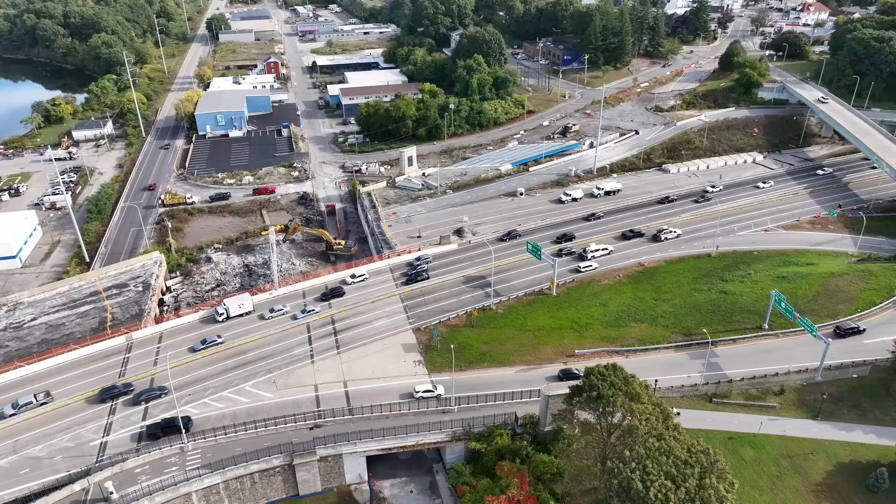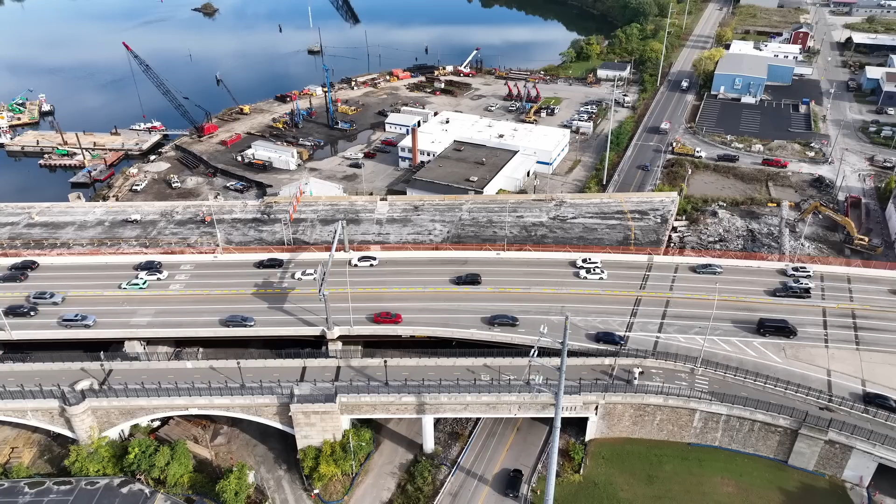Well, hi everyone. I've got a lot of new information that I don't think anybody else in the public domain has at this time. So I want to go over what's going on with the Eastbound Washington Bridge in Rhode Island. As you know, I've done numerous videos about the Westbound Bridge saga going back to its emergency closure back in December of 2023. So I'm not going to address that, but Rhode Island DOT got caught off guard by the poor condition of that westbound bridge, so they had to shut it down in an emergency, and now of course they're tearing it out and going to replace it.

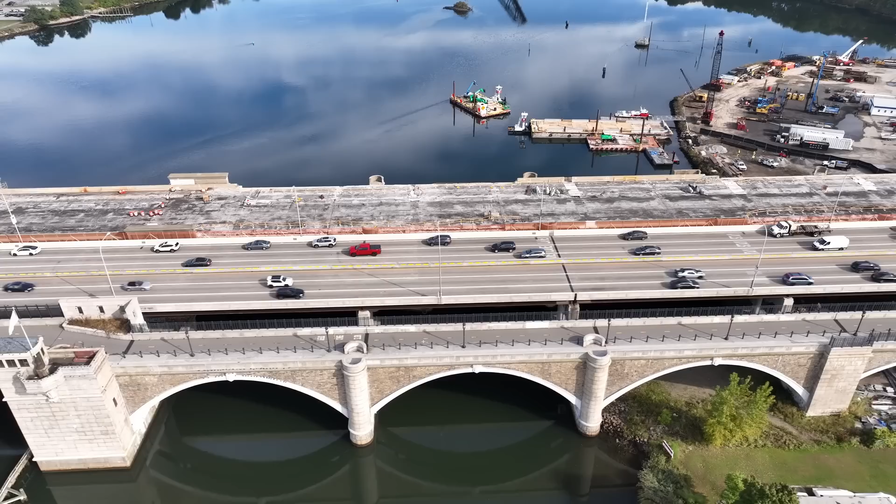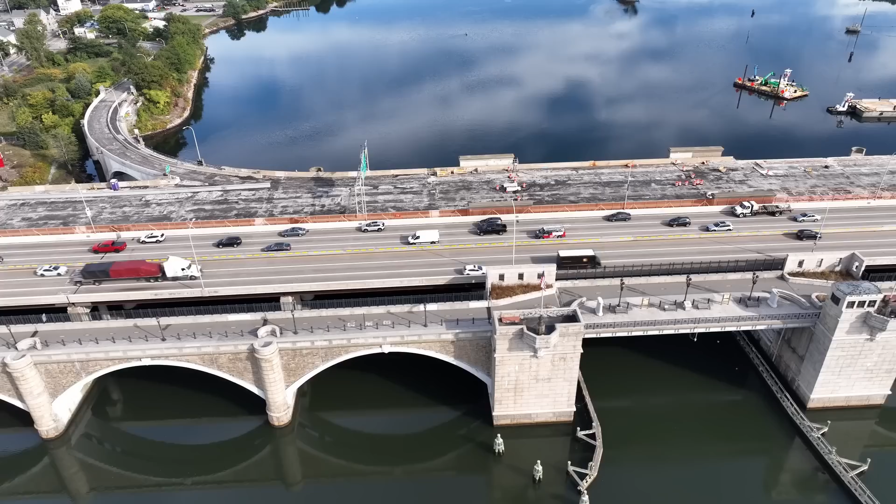But it always made me wonder, what about other bridges in the state of Rhode Island? Are they actually aware of the true condition of these bridges? What about the eastbound bridge? Because the eastbound bridge is now carrying 6 lanes of traffic, double the amount of traffic that it was supposed to be carrying. So I'm going to go through my sources of information. I'm going to share plenty of screenshots. In a nutshell, I'm going to tell you what the condition is of the eastbound bridge, what the concerns are,

and what I think needs to happen to improve the transparency from Rhode Island DOT. I don't think they're transparent at all. And saying they're not being transparent is giving them the benefit of the doubt. Quite frankly, I think a number of their statements, particularly those made by Rhode Island DOT Director Peter Alviti, have been outright misleading. But let's just go through it here.

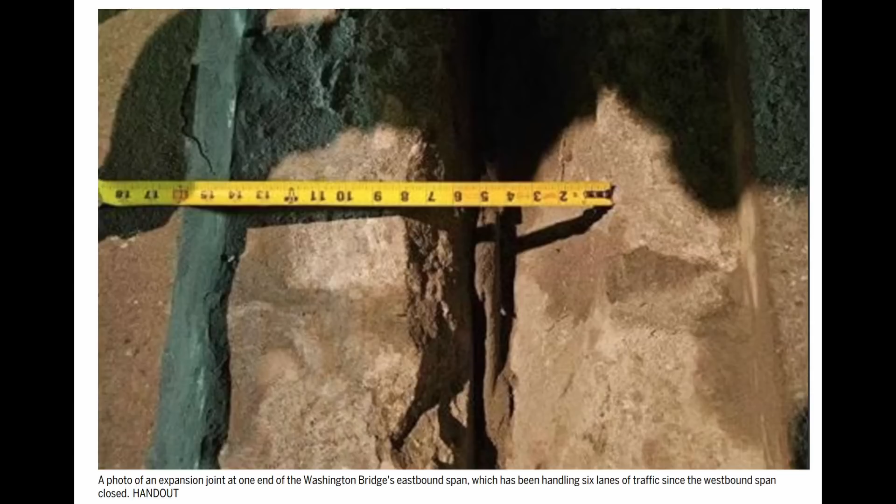And what got me thinking about the eastbound bridge even more was this publication last Friday by Ed Fitzpatrick with the Boston Globe. He cited internal sources for emails, photos, and other information for the poor condition of a joint at the end of the Washington Bridge eastbound span. And here's a photo of this. Now keep in mind, the information that I've compiled indicates that this eastbound bridge was rebuilt in 2008. The original bridge was constructed in around 1930, and it was completely redone in 2008. So you see photos like this for a bridge that was only 16 years old. This is a shocking amount of deterioration at this joint.

So the other thing that happened, the end of last week, Rhode Island DOT actually complied with my request for public information about the condition of the eastbound bridge. And I got a number of inspection reports, photos, and other documents, and I'm going to hit the highlights for you here today, but I'm just going to tell you the bridge isn't in that good of condition. It's rated as fair condition. So again, I'll go through the details.

Now this is one of 2 requests that I made recently. Please provide results of the Bridge Monitoring System Structural Health System for Bridge 200, which is the Eastbound Washington Bridge, from the time of installation in 2024 to date. And their answer was they couldn't send me any information as the Structural Health Monitoring System is still being installed.

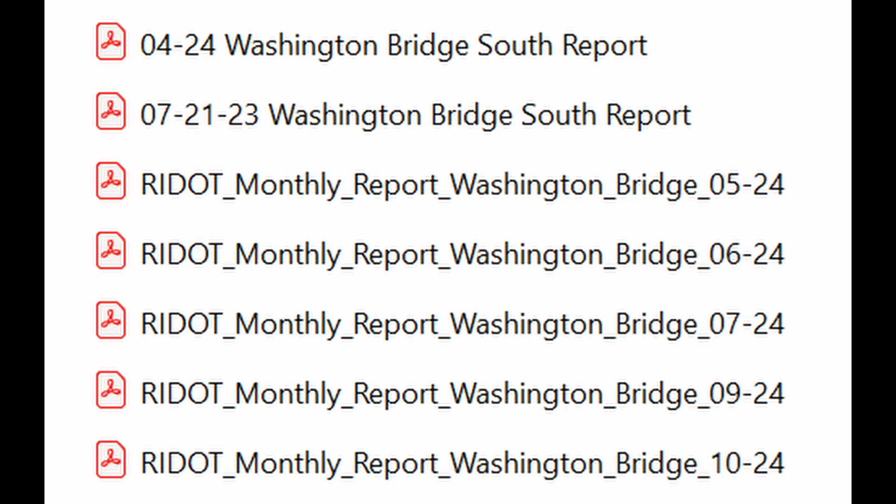And here's an excerpt from that inspection report. The superstructure consists of 10 weathering steel plate girders, continuous over all piers except piers 4 and 9. So they talk about these girders having uneven bottom flanges up to 1/8 of an inch out of plane, with some locations measuring up to 3/4 of an inch out of plane actually. And then their fascia girders have scattered, misdrilled, unused holes near the piers adjacent to the scupper downspouts.

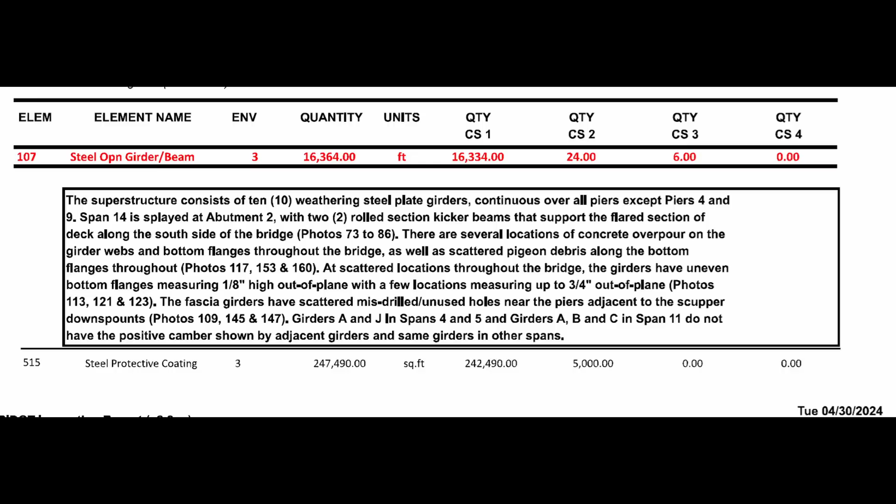And then girders A and J in spans 4 and 5 and girders A, B, and C in span 11 do not have the positive camber shown by adjacent girders and same girders in other spans. So camber, think of it as a gentle bending or arch, say of a bridge deck, or it could be a structural element of a bridge. But think back to that story where there were a bunch of runners on the Golden Gate Bridge and the camber flattened out, which was quite alarming.

So it's a way of safely transferring the load and having some redundancy in the load resistance for the bridge. So when you're missing positive camber, it can be problematic from a loading standpoint.

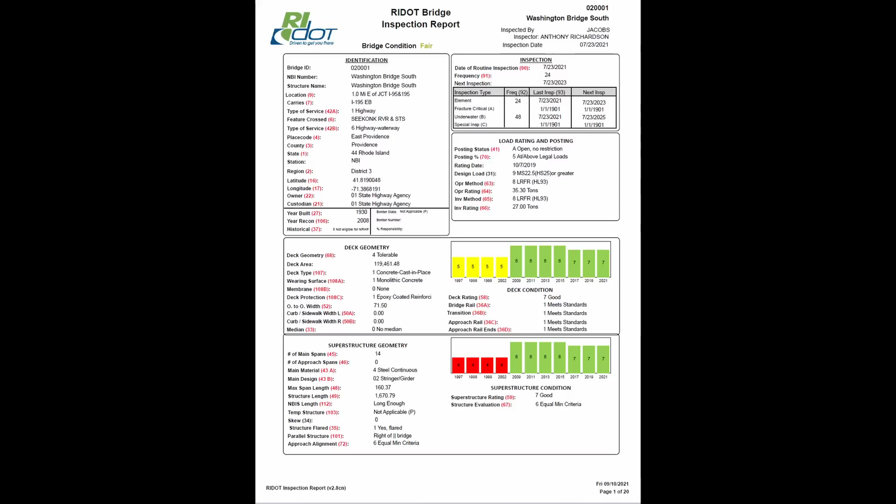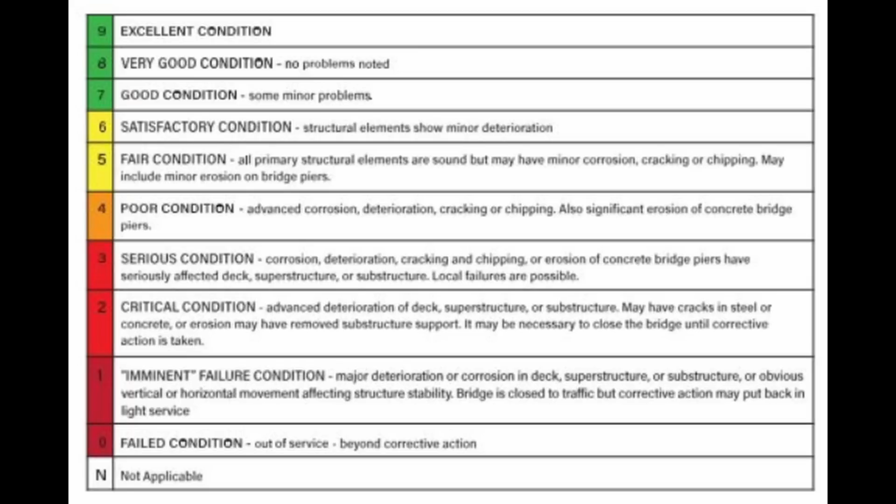And here's the 2021 report. Again, fair condition. In 2019, again, fair condition. So what does fair condition mean for the bridge ratings criteria? It's sort of in the middle of the pack. Fair condition: all primary structural elements are sound, but may have minor corrosion, cracking, or chipping, may include minor erosion on bridge piers. So that's the overall rating.

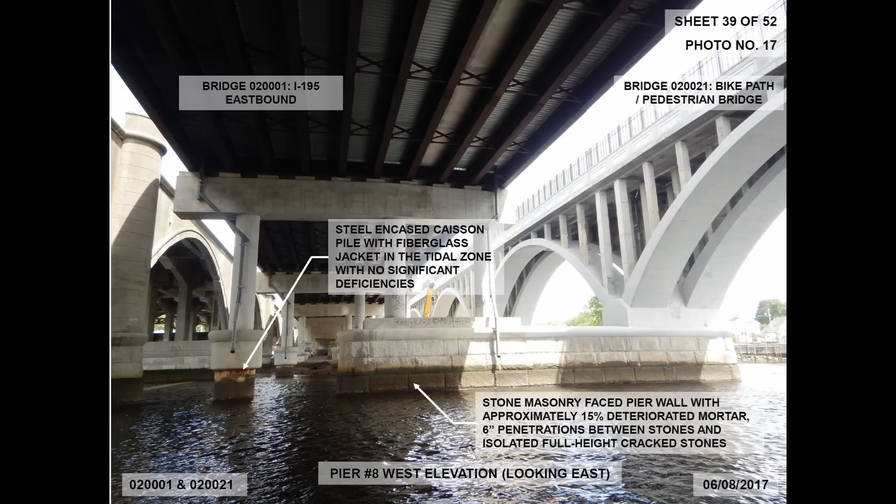So here's a layout of the eastbound bridge, Bridge 020001. There's a pedestrian bridge on the south side, then you have the eastbound bridge, and then north of that you have the westbound bridge. And this is an excerpt out of one of these reports, and you can see it appears, and I haven't been able to find a lot of detailed information about what was done to replace the eastbound bridge in 2008. But it looks to me as if the pier, the existing pier, and undoubtedly the foundations for the original bridge were reused.

You see this pedestrian bridge off to the right. You see this old masonry pier. I mean, that does not look like 2008 vintage to me. And then you have a column on the end of the new pier that looks to be supported by a drilled shaft with a steel outer casing. So it looks to me like they reused the pier, and because the width of the bridge was greater, they had to put in these piers off to the side, these drilled shafts, I should say.

Some people use the term pier and drilled shaft synonymously. I use the word drilled shaft so as not to confuse it with the overall bridge pier. You could have several drilled shafts supporting one bridge pier.

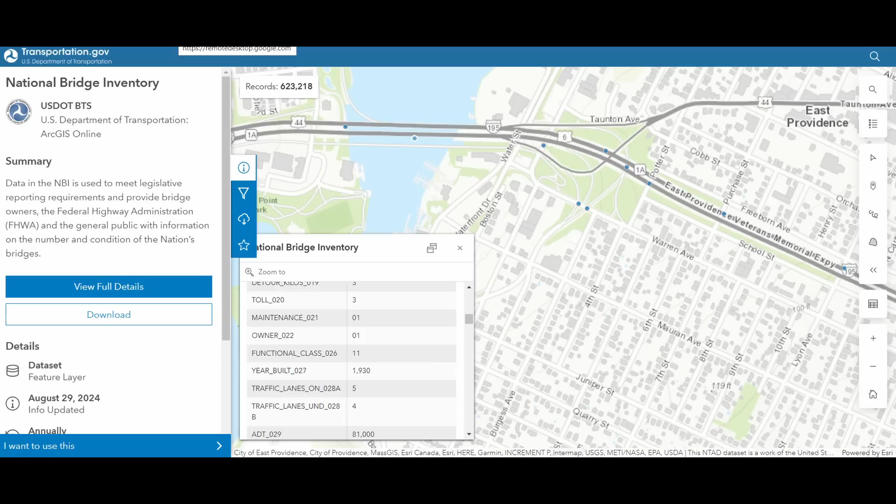And an interesting thing, in the Federal Highway Administration's National Bridge Inventory, they indicate, this was from 2021, that the bridge was built in 1930. I don't know the criteria for listing the age of the bridge in the National Bridge Inventory, but presumably because it's reusing the existing piers and perhaps the existing foundations, that sets the date of the bridge. I don't know, but I just think that's kind of interesting.

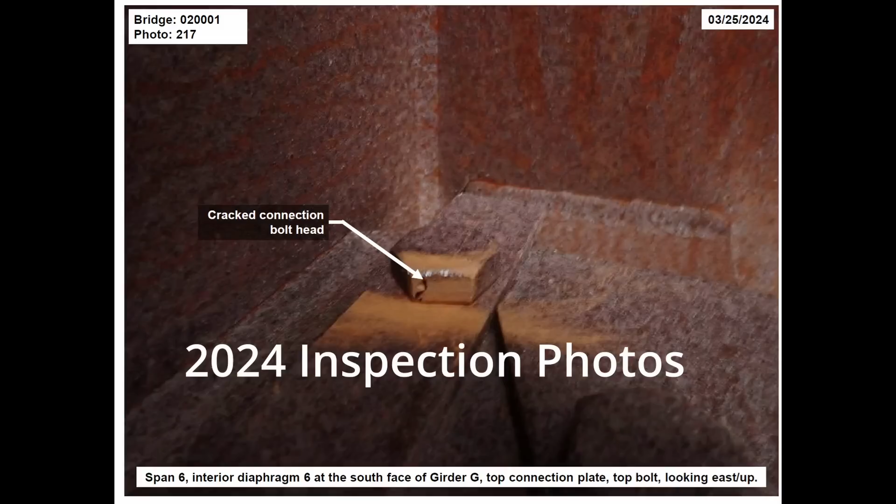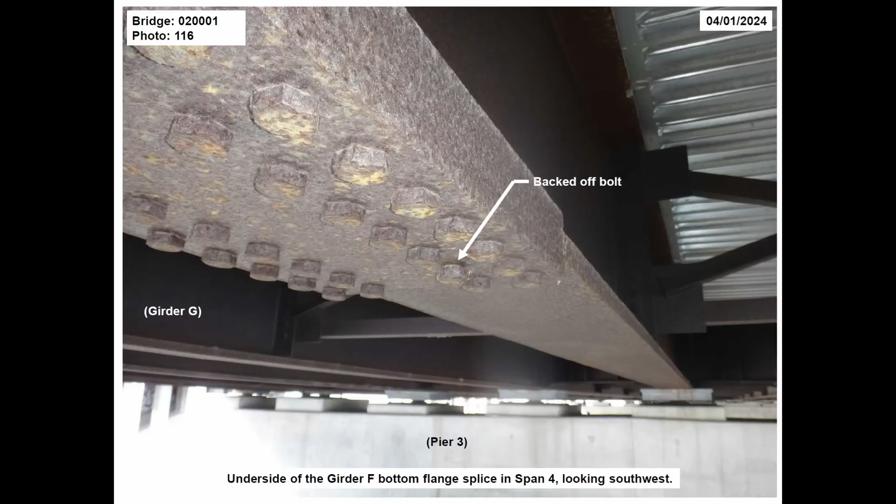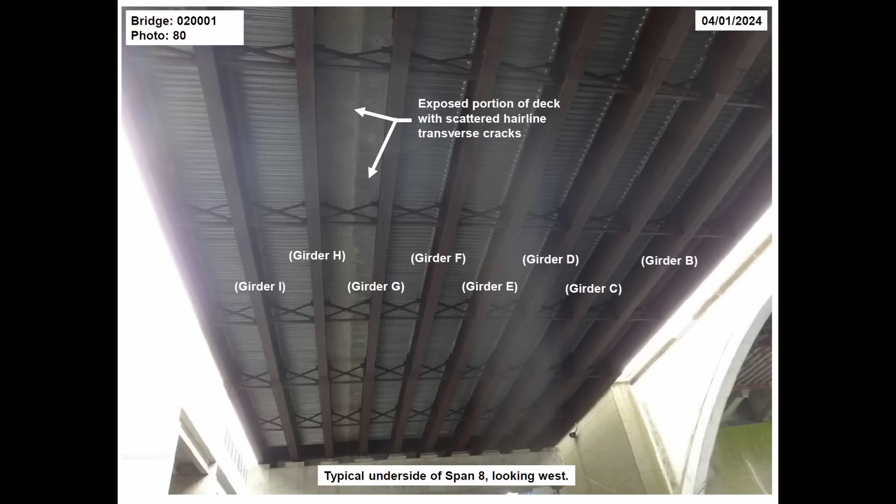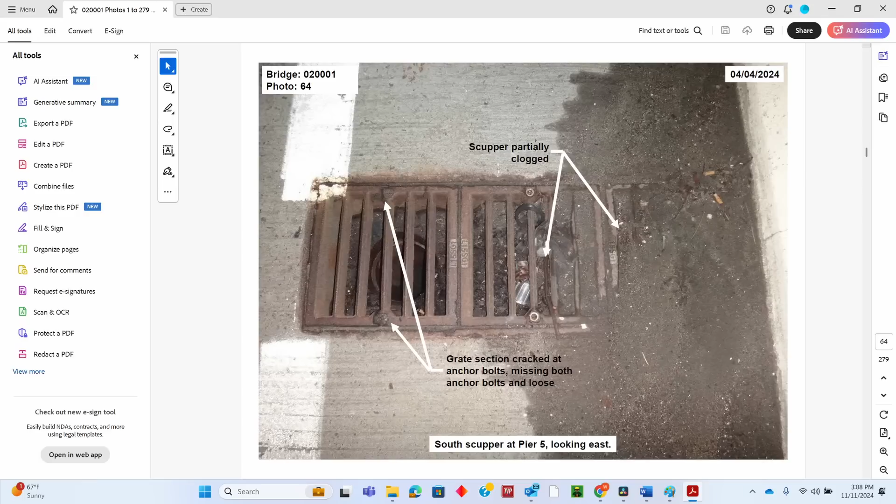So I think there's two basic categories for issues with this bridge. Things that appear to me to be an issue going back to the original construction, and then again, problems with maintenance of the bridge. As an example, you can see all the debris clogging the scupper. A scupper functions as your gutter would on your house, to move water away from your structure.

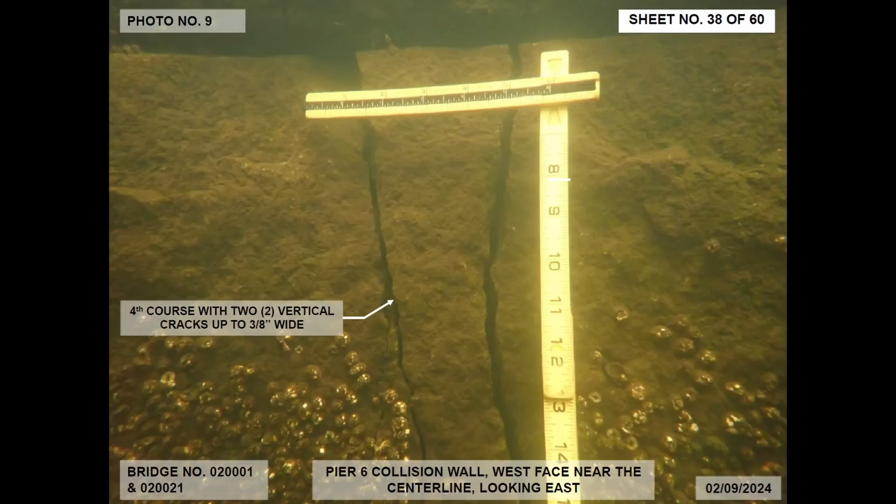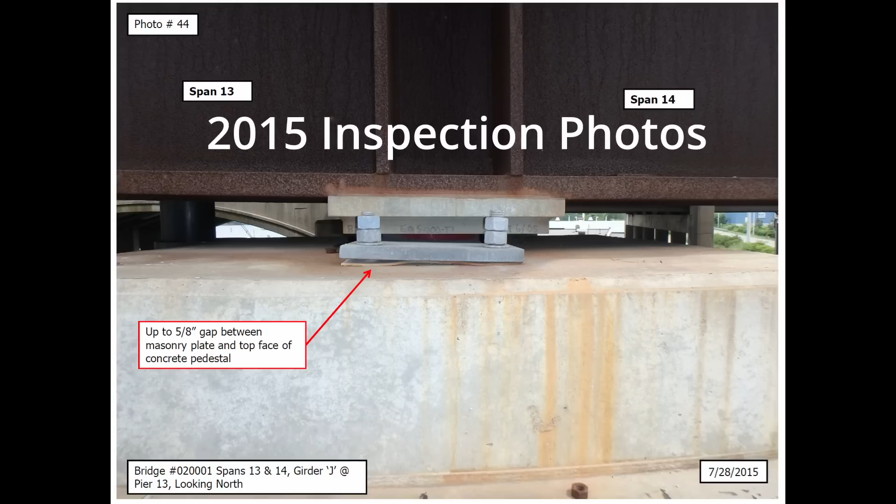Up to 5/8 of an inch gap between masonry plate and top face of concrete pedestal. So the bearing allows for movement of the bridge, but you still have to transfer the load to the pier cap and then in turn to the foundation. And so obviously you want nice, uniform, even contact of these bearing plates with your pier. And they don't have that in a number of cases.

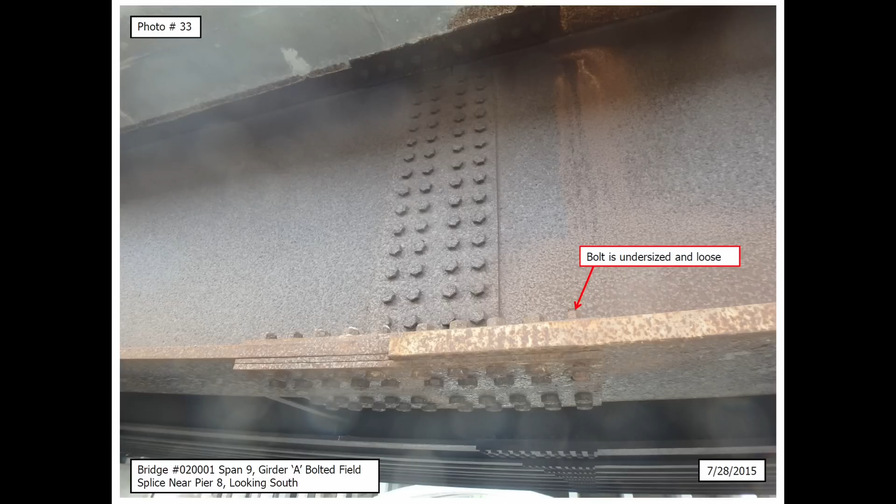You see areas of concrete spalling underneath the bridge deck, another gap on the bearing plate, undersized bolt and loose. That's the same one we saw in the 2024 inspection. They noted it back in 2015. There's a bunch of missing bolts on the bottom flange of this girder.

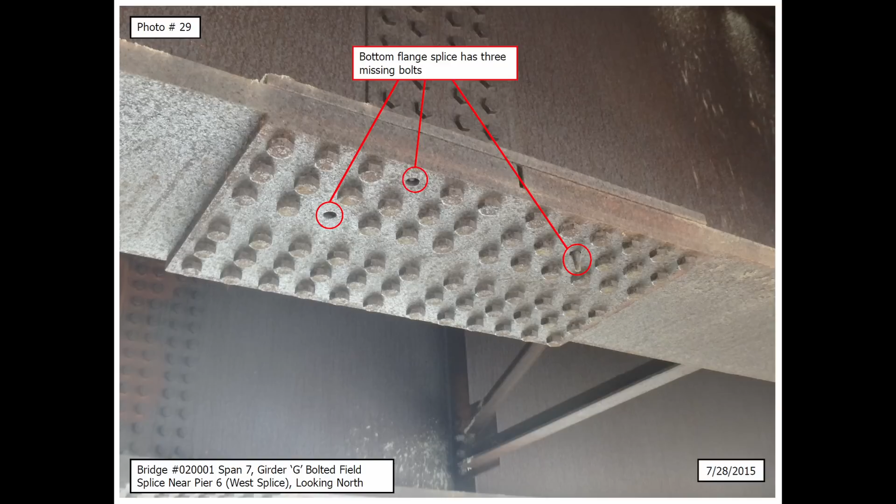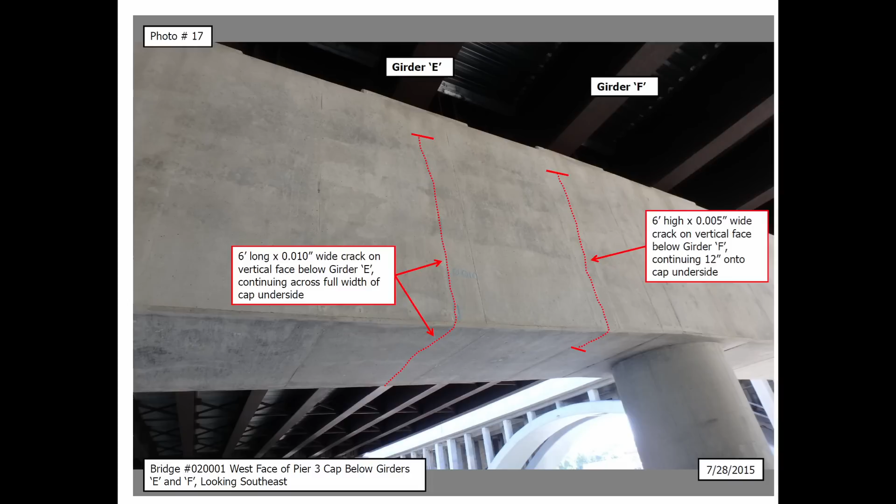I couldn't see where they took a picture of this exact location in subsequent inspection reports to tell you whether those bolts are still missing or not. A lot of corrosion going on these structural steel members. Another bearing plate gap. 6 foot high, 0.005 inch wide crack on vertical face. So small cracks, but they go pretty much the full length of the pier cap. So this is concerning to me.

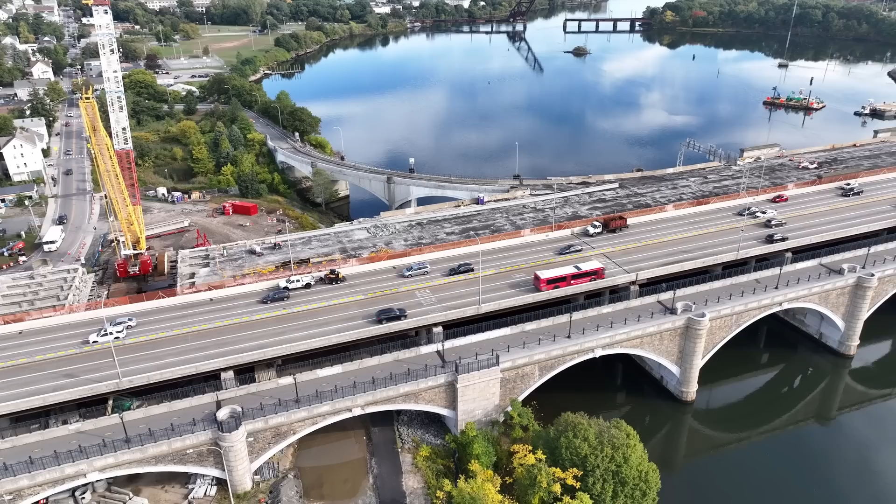I mean, again, they're doubling up on the traffic on this eastbound bridge, and the eastbound bridge is the only way to get across the Seekonk on I-195, and that's likely to remain the case for at least 4 years, the time it takes or will take for them to replace the westbound bridge. And right now they don't even have a contractor selected to do that design and construction.

You know, the local news media has questioned whether Rhode Island DOT has assessed whether the eastbound bridge could take this additional traffic. Now, Rhode Island DOT Director Peter Alviti has indicated that he has engaged 2 or 3 outside engineering firms who have apparently indicated to him that the eastbound bridge is in sufficient condition to convey all 6 lanes of traffic. However, Rhode Island DOT, again, in their lack of transparency that's been going on since the closure of the westbound bridge in December, hasn't produced those reports. So it's not clear what evaluation was done.

Presumably they would have looked at the existing bridge inspection reports as well as what the new loading would be, and done some type of engineering analysis to determine whether the eastbound bridge could not only handle that traffic, but if it can, for how long a period of time before additional degradation of the bridge would occur from all this cyclic loading of the passing traffic.

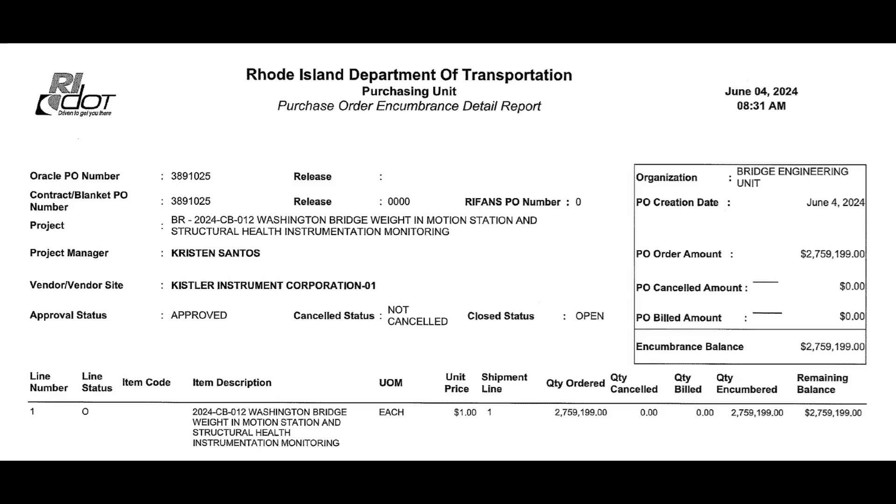This is a purchase order for the bridge weight in motion and structural health instrumentation monitoring system. I want to thank Rob Cody for sending me that information on that monitoring system. I'm sure a number of you in the region are very familiar with Rob. I've talked to him a number of times. I think he's a great guy. I really enjoy his attitude and professionalism to basically calling out issues on public infrastructure projects. And unfortunately, there's too many issues going on here with Rhode Island DOT, and they simply can't be ignored.

Rob's background is an ASNT Level 2 in UT, PT, and MT. These are non-destructive test methods for steel. And he has over 30 years of inspection service experience on numerous projects, including power plants, high-rise construction, schools, and shipbuilding. So this was an interesting document.

The scope of this monitoring system indicates the eastbound Washington bridge has become considerably more sensitive since the closing of the westbound bridge. Now, when I hear that, I think the bridge can't tolerate as much loading or cyclic traffic as before, but it's not clear to me. I think perhaps what they mean is that the eastbound bridge has become even more critical now that the westbound bridge is closed. But again, that's a little vague to me.

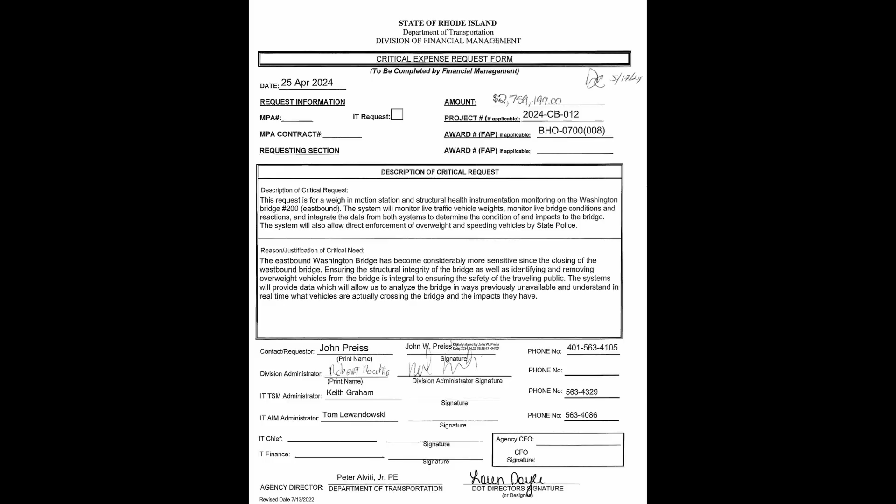Ensuring the structural integrity of the bridge, as well as identifying and removing overweight vehicles from the bridge, is integral to ensuring the safety of the traveling public. The systems will provide data which will allow us to analyze the bridge in ways previously unavailable and understand in real time what vehicles are actually crossing the bridge and the impacts they have.

But surprisingly, this system isn't operational. As you saw from the response to my request for public information, they can't give me the results of the monitoring because they're still putting in the system. So again, their own justification for this monitoring system is how critical or how sensitive the eastbound bridge is, but yet they're going to go nearly a year and not have the system up and running.

I've done a number of recent videos that incorporate InSAR data that's been supplied and analyzed by Value Space. So again, I really appreciate their support in these types of videos. And I've got data for the Washington Bridge.

Originally, I was curious as to whether the westbound bridge would have shown issues that would coincide with those broken anchor rods that forced the shutdown of the bridge back in December. And surprisingly to me, they came up with areas of concern on not only that location of the westbound bridge, but on both sides of the eastbound bridge. So I'm not going to go into all the details of InSAR because I've covered that in other videos.

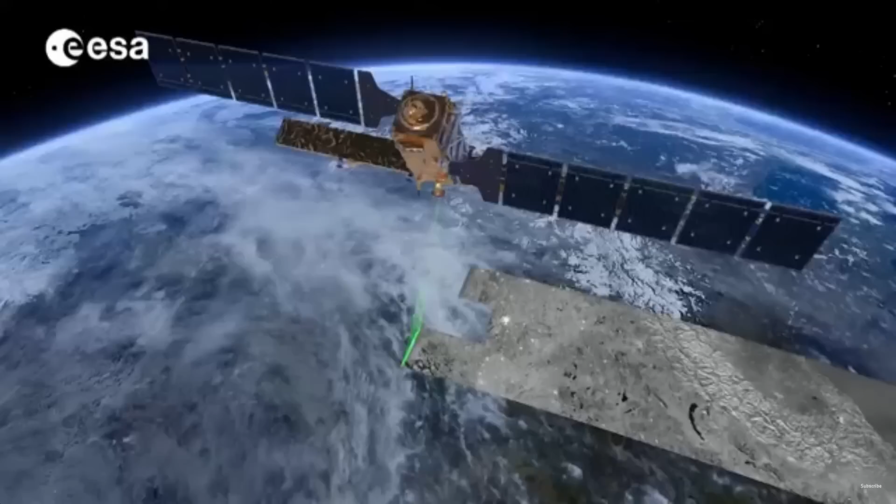Suffice it to say, there's a satellite, there's actually 2 satellites that orbit the Earth in a polar orbit, and a microwave signal is beamed to the ground and reflected back up to the sensor array. And because these flights occur every 12 days, and the wavelength of the microwave signal is 5.5 centimeters, they can get very fine resolution of movement.

So this is being used in what's called asset management. Insurance companies use it to assess risks, but owners of infrastructure like bridges and pipelines can certainly use this technology as an additional stream of data that could potentially provide early warnings of a problem that was developing with, say, a bridge in this case.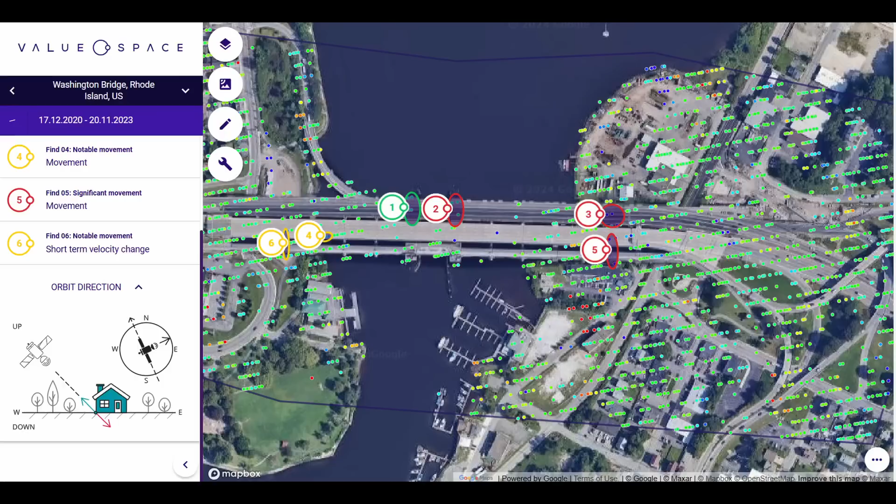They can also use this technology to do things like measure ground uplift from, say, a magma intrusion. They've used this technology in Iceland, and they can get an idea when an eruption is about to occur. So it's the same technology. But again, let's look at these spots here. I'm going to focus in on the east side here, and we can see some deflections, that location of the bridge, and again here. And oddly, there's been a change in the trend.

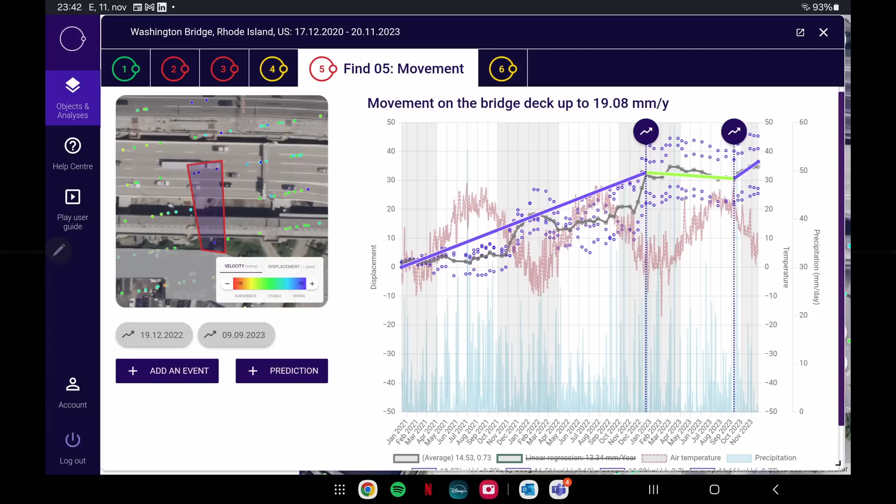So those changes in the trends don't coincide with seasonal variations, which, you know, winter, summer, you have different ambient temperatures, which can cause shrinkage or expansion of structural elements. And this trend is contrary to that. It's not coincident with seasonal variation. So I wouldn't suggest using this data right now in an absolute sense to say, yes, they definitely have a problem, but it's definitely a red flag.

And I think, with this technology, you really need to incorporate what they call ground truth into the analysis. So based on this InSAR data, if I was Rhode Island DOT, I would get out there and look at these spots to see if there's a reason for these apparent indications of deflection. So what I'm going to leave you with today are questions that I think should be asked by local media and by local politicians here to force some accountability for Rhode Island DOT and how they're dealing with this Washington Bridge saga.

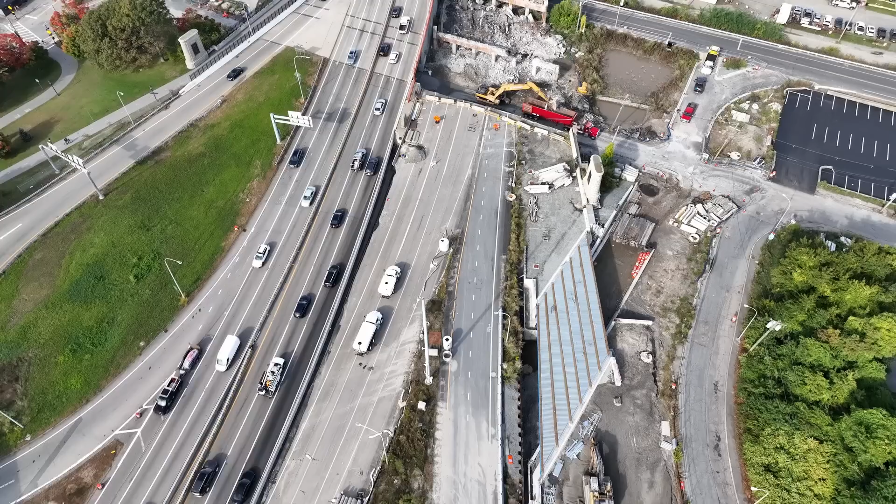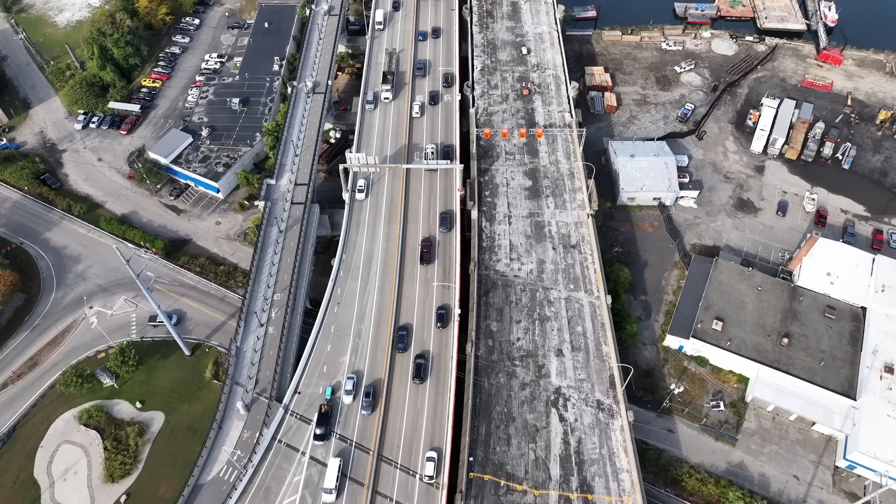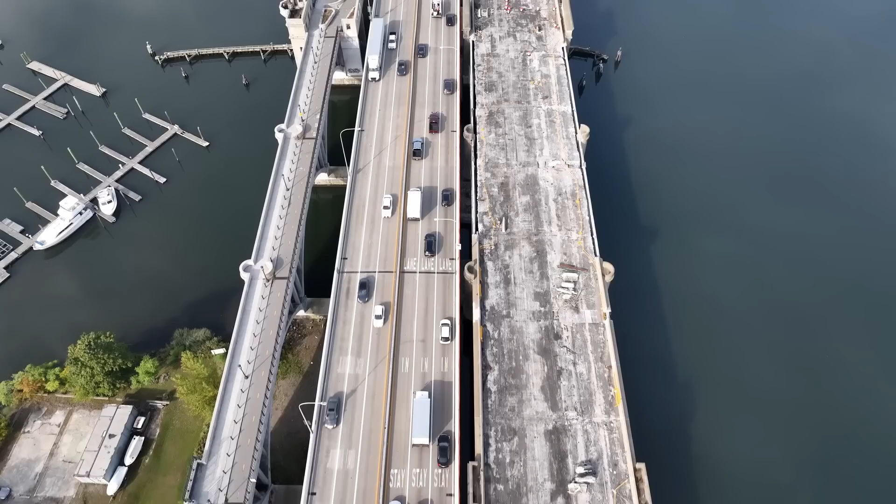So the first thing I would ask for is provide the engineering analysis for the eastbound bridge relative to increasing the number of lanes of traffic, basically the existing eastbound lanes plus the new westbound lanes that are going over the eastbound bridge. Post it to your website. Let's see firsthand. I mean, they said they had 2 or 3 firms look at it. Why did they have different firms look at it? Did they agree? Did they call out different concerns, if any? I think it just begs a lot of questions here.

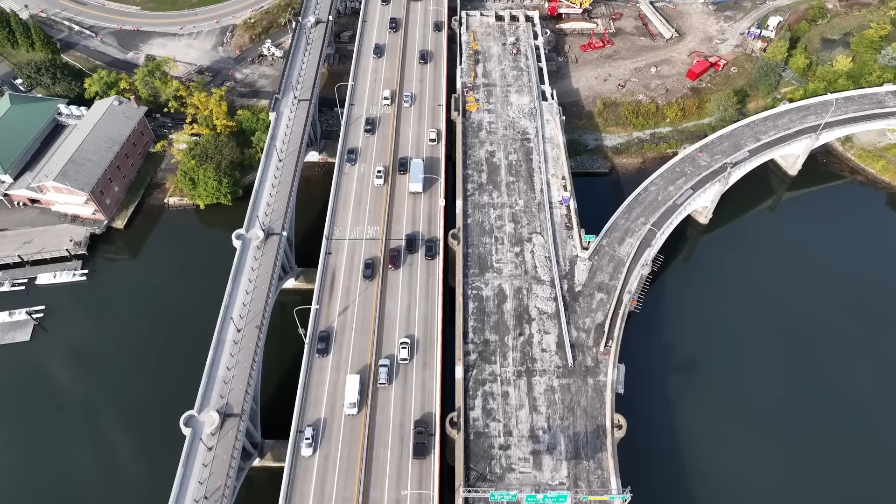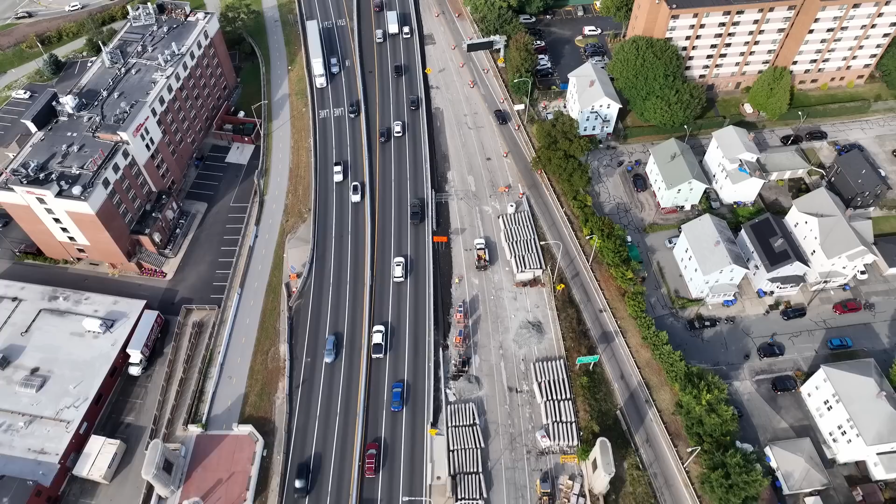Another question I have is, in all these previous inspection reports that show missing anchor bolts or cracked masonry in the pier, what, if anything, has been done to effect repairs from the time of one inspection to the next? It looks to me like these areas of distress are only increasing in number and extent over time, and that they haven't done anything at all to address these problems.

And the third question I have is there any potential for the need to close the eastbound bridge to do repairs or because of some serious issue, just as what had occurred for the westbound bridge? I mean, this situation is critical now. It was critical before, but it's really gotten worse. I mean, there's numerous car crashes I've seen reported as a result of all these extra cars being jammed into one side of the bridge, the eastbound bridge.

So is there anything at all that could rear up and result in a sudden closure or a closure that extends for, you know, days or weeks in order to implement some type of necessary repair? I think that question needs to be answered.